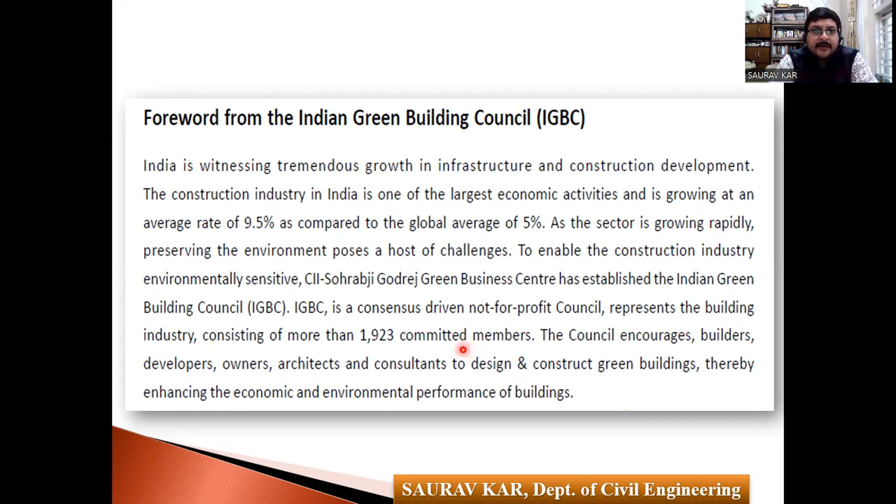To make the construction industry environmentally sensitive, the CII-Sohrabji Godrej Green Business Center has established the IGBC. IGBC is a consensus-driven non-profit organization representing the building industry, consisting of more than 1900 committed members. So mainly all the cement companies and construction companies are members of IGBC.

Okay, so see, this is a complete list of the organizations, institutes, and it is unending. If I pick up the big shots, the big players, we have AECOM India, we have Fortis, we have Ashray, we have Godrej and Boyce, we have Ultratech also, IIIT Hyderabad. Okay, now we also have Kirloskar.

So not only civil engineering companies, but also mechanical engineering companies are there. NICMAR Hyderabad, NICMAR Pune, Tata Motors, TCS, Shapoorji Pallonji we have. So this list of companies is unending. So they are the members of IGBC, and every year IGBC hosts a conference or event, keeping in mind the issues to be followed for the next years.

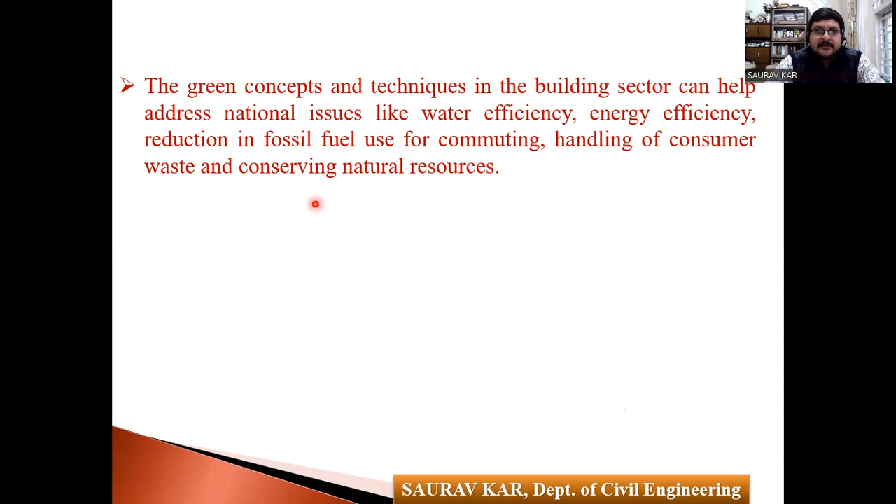Okay, so the green building concept and techniques in the building sector can help to address national issues like water efficiency, energy efficiency, reduction in fossil fuel for commuting, handling of consumer waste, and conserving natural resources. Against this background, IGBC rating system has been launched. This rating program is a tool which enables the designer to apply green concepts and reduce environmental impacts that are measurable. The rating program covers methodologies to cover diverse climatic zones and changing lifestyles.

Okay, so basically, this rating program is a very big program where a lot of points are awarded based on a lot of criteria. Now it's quite obvious that there may be between 10-20 criteria, and your particular organization or your building is strong in, for example, a few particular areas. So from those particular clauses, your points will be gained, while another building may not be strong in that criteria. They might be strong in other criteria.

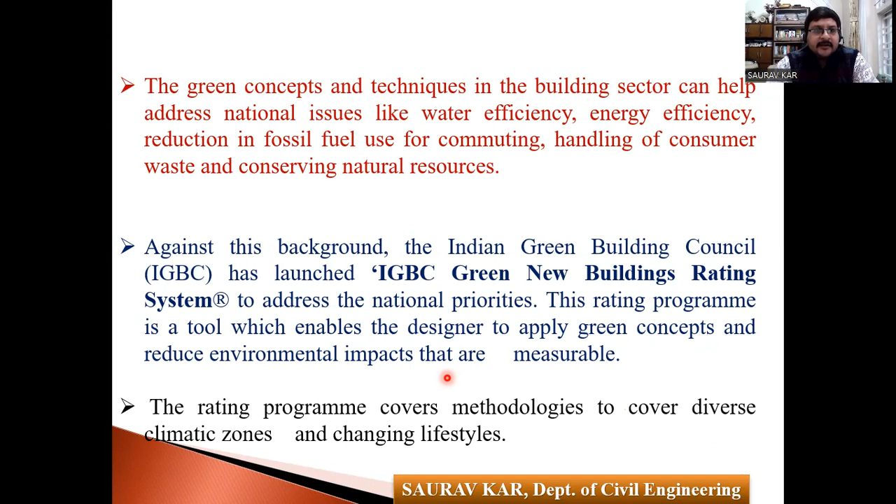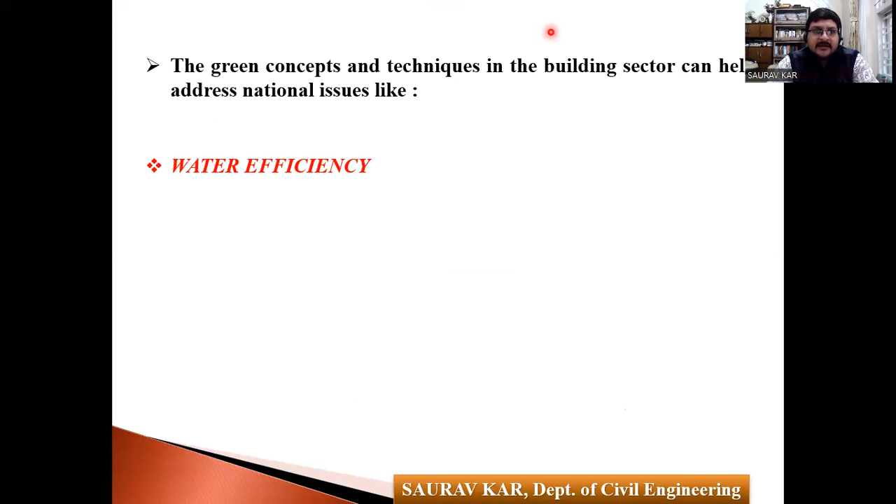So the IGBC have not confined. They have prepared a wide variety of diverse point criteria. It's not confined within these things. Okay, so it's very diverse. Now, the green concepts and techniques in the building sector can help address national issues: water efficiency, energy efficiency, reduction in fossil fuels, handling of consumer waste, conserving natural resources. Okay, so these are the main issues.

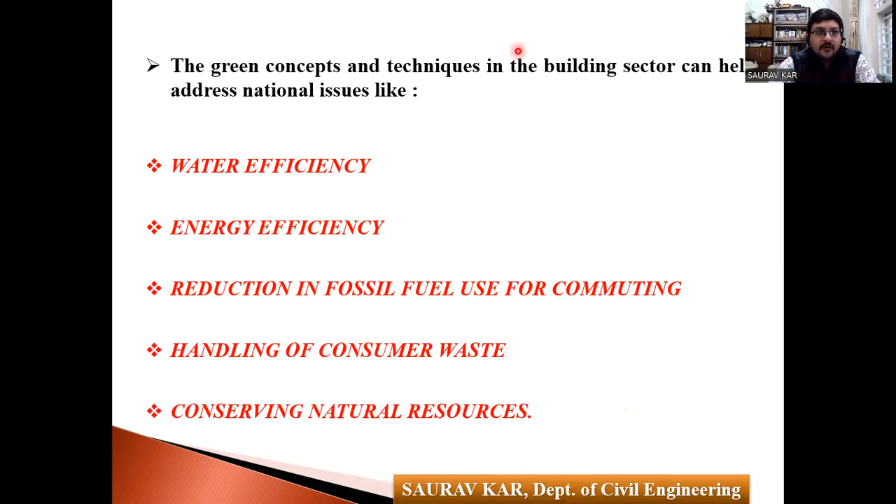Water conservation. So now, I will be focusing on all these issues one by one in detail. Water conservation. First, most of the Asian countries are water stressed, and in countries like India, the water table has reduced drastically over the years. So IGBC new building rating system encourages use of water in a self-sustainable manner to reduce, recycle, and reuse. So under water conservation, they have given a lot of criteria: how much water can be supplied or restricted for toilet usage, kitchen usage, and other household usage.

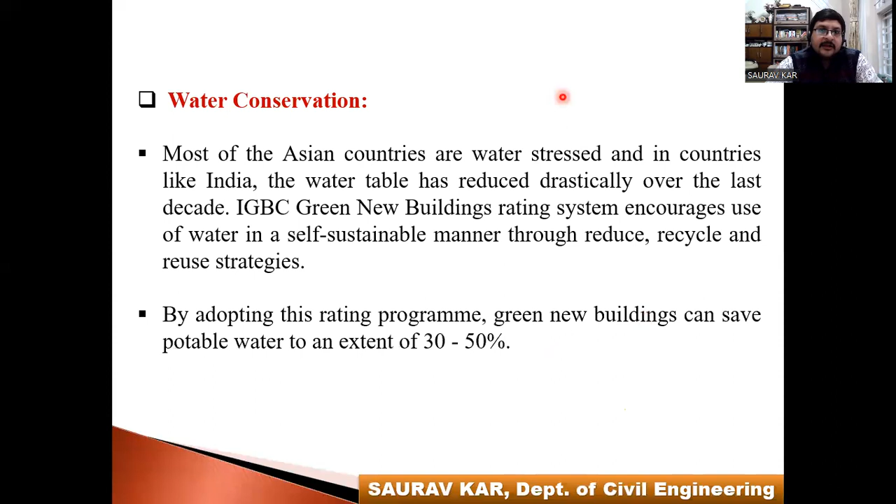Okay. Next, by adopting this rating program, green new buildings can save potable water to an extent of 30 to 50%. Study says that 30 to 50% water conservation can be achieved using this new program. Next, handling of consumer waste. Even waste disposal or waste management is also addressed by IGBC. That is why they have a criteria known as handling of consumer waste.

Nowadays, the local municipal bodies everywhere have already delivered two types of dustbins, green and blue, dry waste and biological waste. So these things I will be discussing here: which type of waste is to be dumped in which type of dustbin, all these things, handling of consumer waste. So most of the waste generally is not segregated at the source and has a high probability of going to landfills. Okay. So all the waste, they are not dumped into the landfills. We have Dhapa near Science City, which is the biggest landfill area in Kolkata. Okay. So they are all monitored.

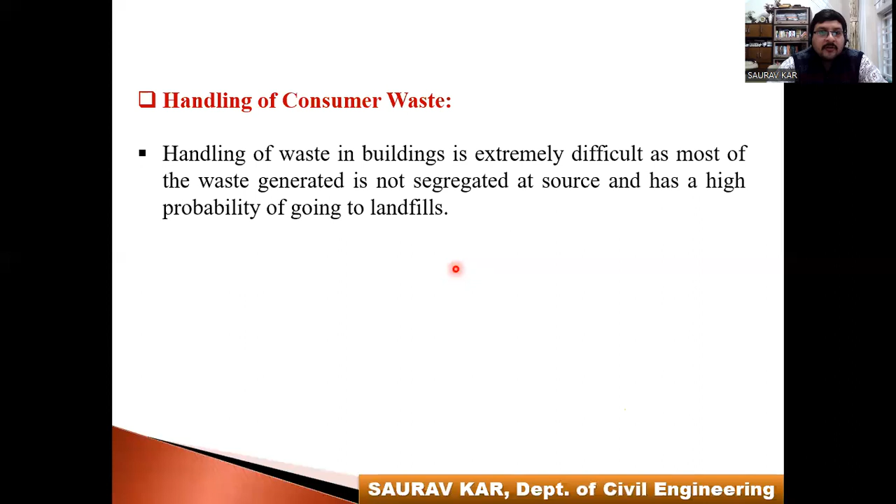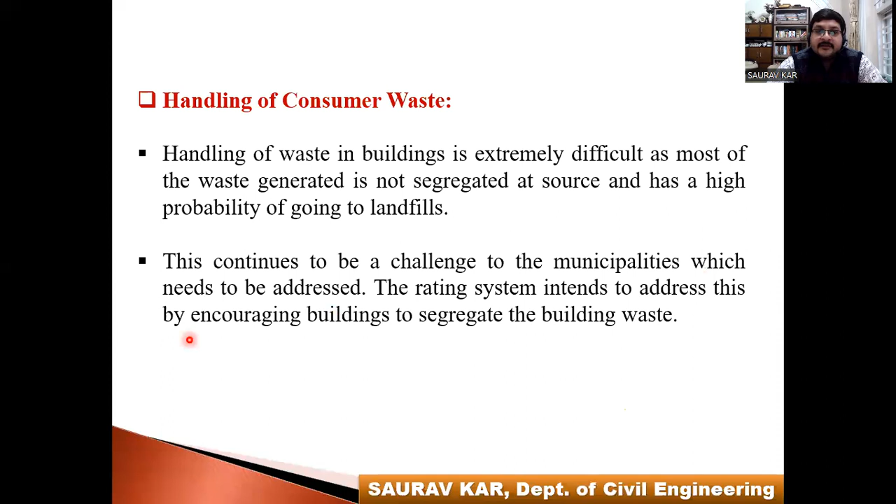There continues to be a challenge to the municipalities which needs to be addressed. The rating system intends to address this by encouraging buildings to segregate the building waste. Energy efficiency, already I discussed this. Net zero building, okay. So with the IGBC rating system, buildings can reduce energy consumption through energy efficient building envelope. Lighting, I will be discussing how lighting affects your energy consumption.

Air conditioning system, yes, under this we have HVAC, heating, ventilation, and air conditioning, right? So we have HVAC also. In the last class, I discussed HVAC, another issue of energy efficiency, okay? Not only AC, but heating and ventilation also. By adopting the rating system, energy savings of about 20 to 30% are observed. And it's not theoretical. The proof is in hand.

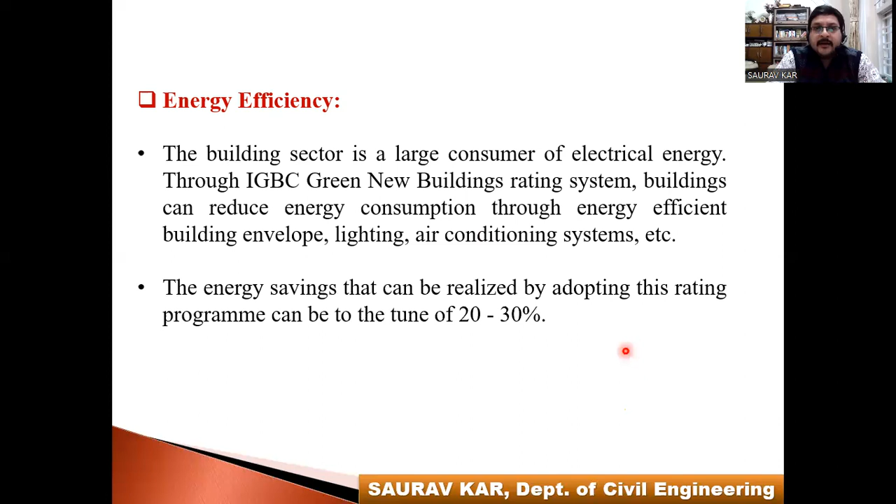Some of the office buildings, some of the residential buildings in Bangalore, are saving a huge amount of money by implementing energy efficient tools. One big important issue is that the initial cost is a bit high. The setup cost is a bit high, but over the long run, it will be effective. So the overview and processes.

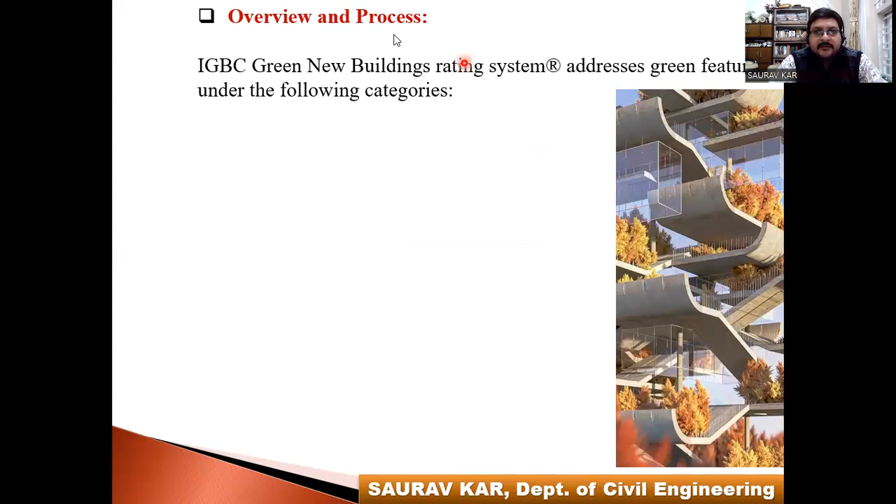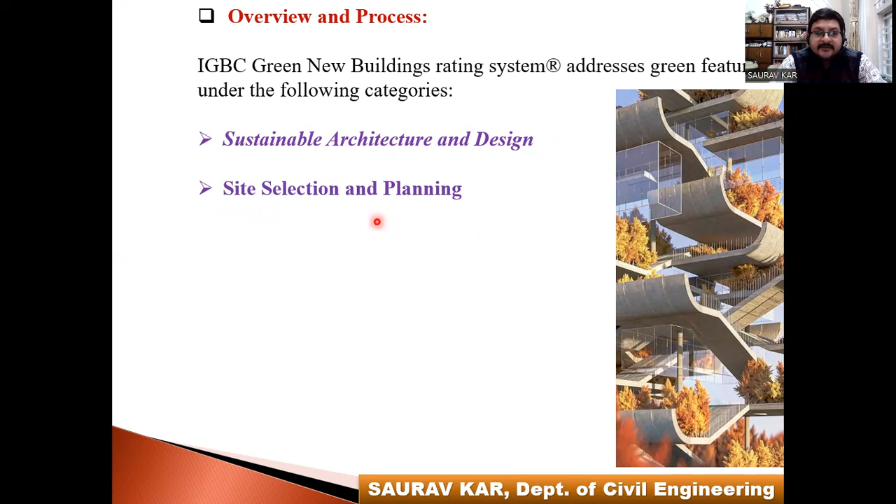If we talk about the overview and processes, it has a lot of categories, which I was talking about: sustainable architecture and design, site selection and planning, water conservation, energy efficiency, building materials and resources, indoor environmental quality or indoor air quality, and innovation and development. So 1, 2, 3, 4, 5, 6, 7. So 7 different categories are given.

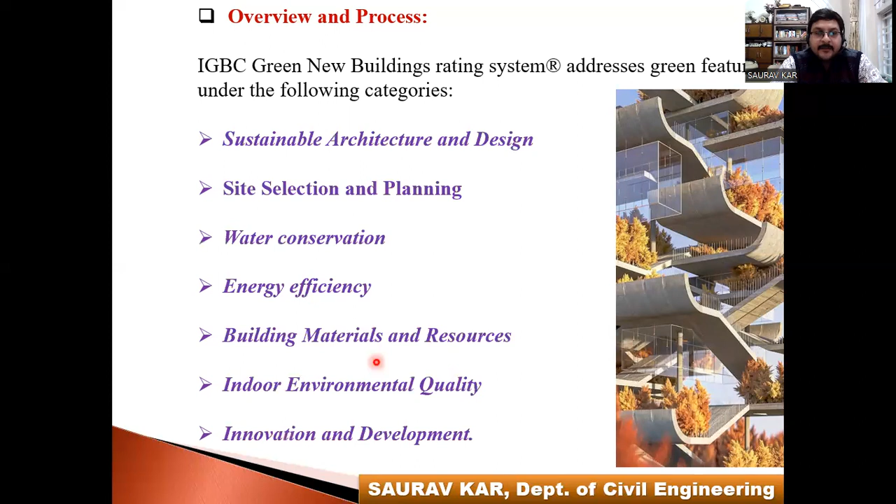Sustainable architecture and design, so under this we will learn a lot of things. Under this issue, we will have a lot of points on how that can be attained. Site selection and planning, water conservation, energy efficiency, building materials and resources, indoor air quality, innovation and development. So see, this is the complete chart, the list they have given. If you see here, the modules are there and the points are available.

The points are segregated based on two types: owner occupied buildings and tenant occupied buildings. One is purely residential and one is purely commercial. Okay. So they have a complete 100 points. Sustainable architecture and design has 5 points. For both the cases, 5 points have been awarded in this sector. Under this, we have credit 1 integrated design approach, site preservation, and passive architecture. So they have their weightages.

Under site selection and planning, I will come to all these issues, I will come to all these topics day by day. Okay. Site selection and planning, we have 14 points. Under these, we have local building regulations, soil erosion control, low emitting vehicles, natural topography, heat island reduction, how we can reduce the heat formation of the cities, and outdoor light pollution reduction.

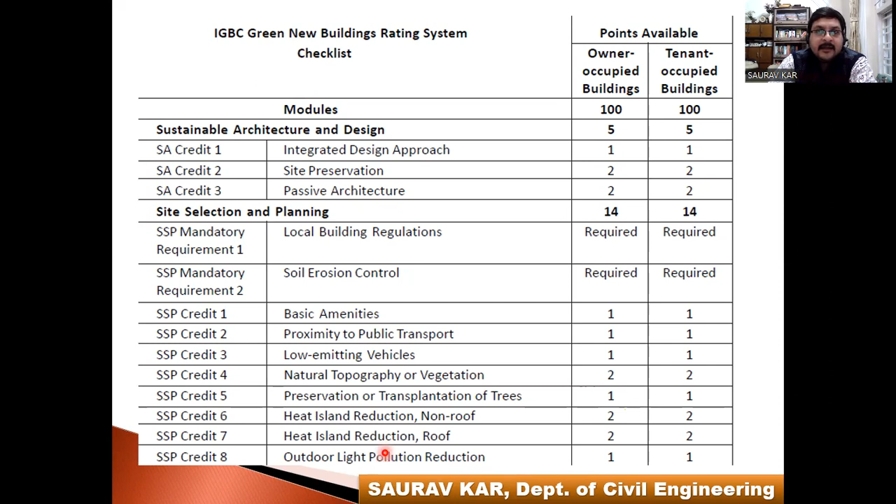Not only will we reduce the energy usage in our building, but also how we can reduce the light pollution to the outside environment or the area which is sharing with my building, because I am hampering my surrounding area. That is also a very big issue.

Then water conservation, we have 18 for owner occupied buildings and 19 for tenant occupied buildings. Water conservation, as you see, has a huge number of points. Rainwater harvesting, roofing and non-roofing, water efficient plumbing fixtures, very, very nice. This issue has been highly addressed by the Plumbing Association, the Indian Plumbing Association.

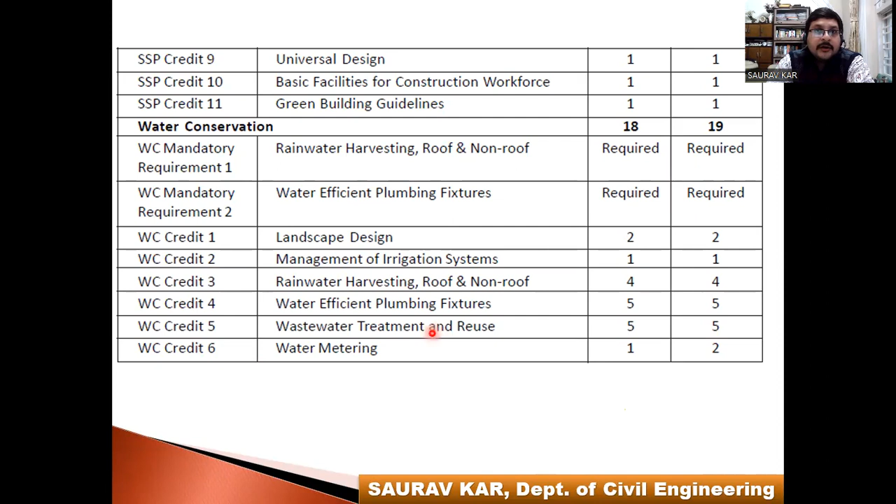We have water metering. Water metering is a fantastic concept. I think by 2030, a lot of the local municipal bodies will be issuing water metering. That means, just like we have an electricity meter at our home, similarly they will have a water meter which will detect or control the water usage or water wastage in the building.

So based on this, we have certifications. The first level is certified, which has 50 to 59 points, not 60. From 50 to 59, it is known as good practices. They will be just rated as certified. Okay, so the IGBC will come to a building and they will certify you. Next is silver, 60 to 69, best practices. Gold, 70 to 79, outstanding performance. Platinum, 80 to 89, national excellence. Super platinum, 90 to 100, global leadership.

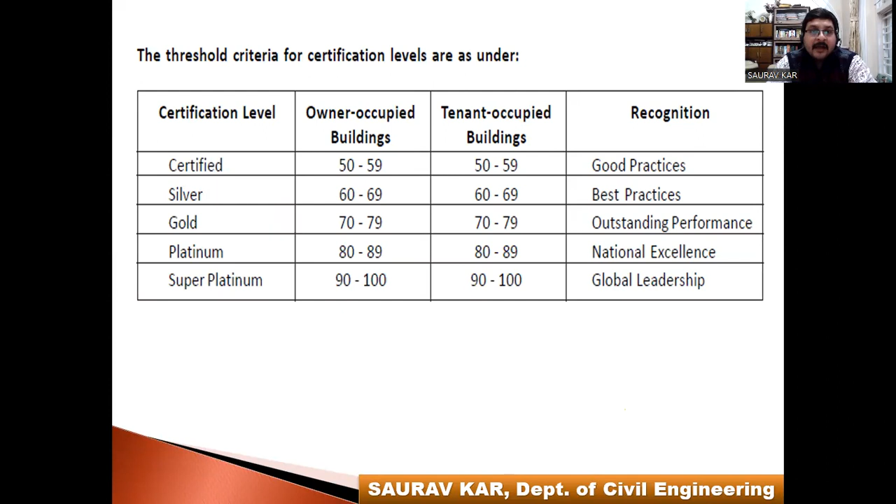So certified, silver, gold, platinum, super platinum. So there are 5 types of ratings given by IGBC in India. In foreign countries also, we have a lot of governing bodies. We have LEED, we have BREEAM. Okay, let me show you that slide also. We have LEED.

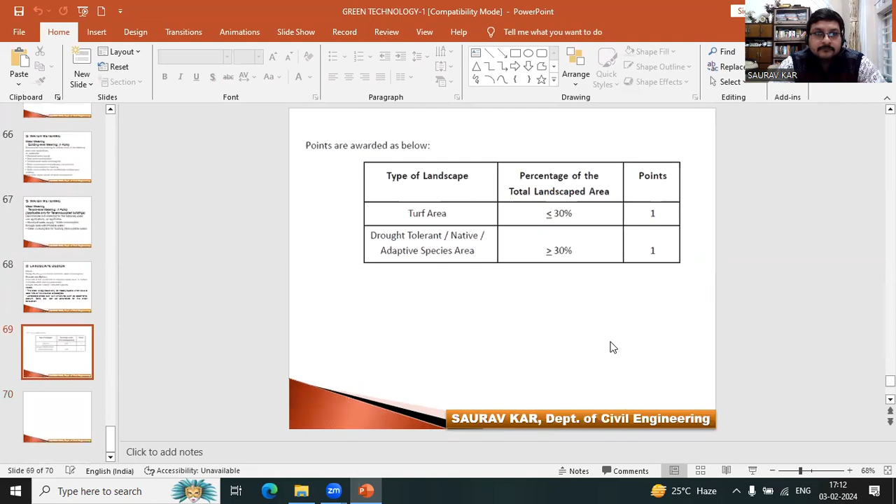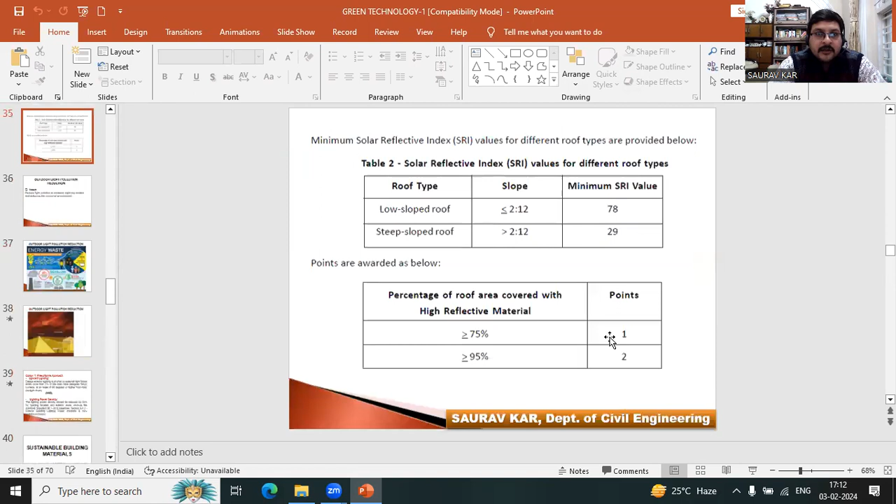So in the UK we have BREEAM. We have LEED, and in the UK and European countries they also have different councils.